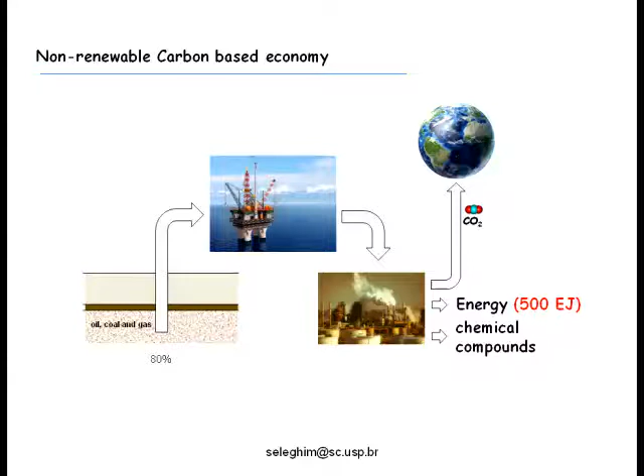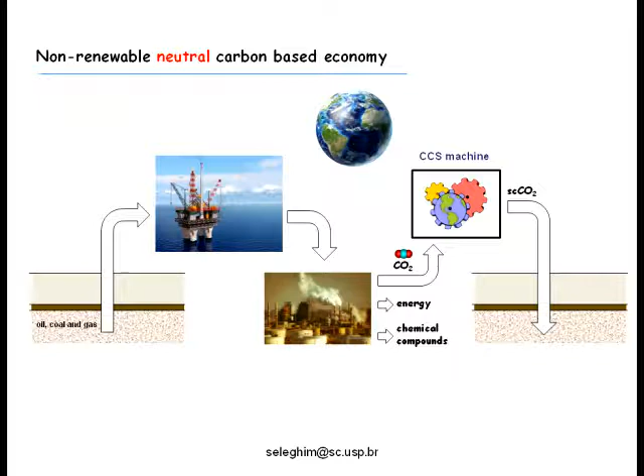The solution would be to have, if not a renewable, at least a carbon-neutral based economy. So we would need, this is just a proposition, to build something like a CCS machine, a carbon capture and storage machine, which of course will need energy to perform this task. And this CCS machine will have to inject those carbon atoms back underground. That's one possibility, but I'm going a little bit further.

We could build a renewable, neutral carbon economy. If we tackle renewable sources like biomass, which is basically solar energy stored in the form of chemical compounds in the plant, and manage to do that at the scales necessary—because scale is a very important issue in this context—this carbon atom actually was in the atmosphere. So, in principle, it's neutral.

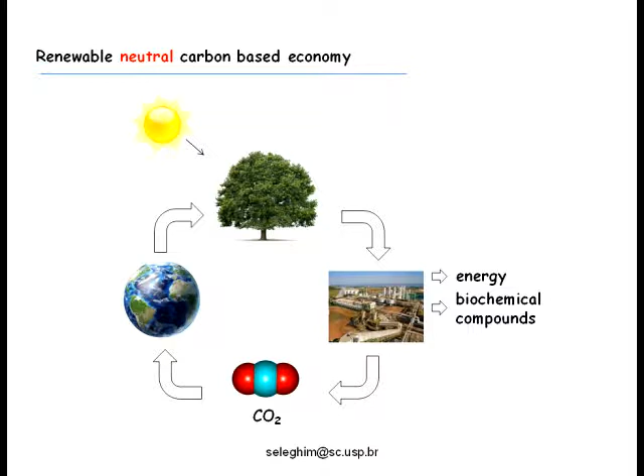We can go a little bit further and try to devise a renewable, negative carbon-based economy. What about this, this is just speculation. I'm going to show that this is possible. We're making all the calculations to prove that this is really possible.

What about transforming our biorefineries into CCS machines? If we take a little bit of the energy that this biorefinery is capable of producing and use it to capture and produce what we call supercritical CO2—I'm going to explain what that is—which is adequate for underground injection. Those are the ideas I'm showing, and that's more or less the guideline of this presentation.

Try to go from a carbon-positive economy to a carbon-negative economy. I'm going to try to emphasize the technological challenges related to these ideas. Bioenergy and biorefineries are certainly one of the most interesting possibilities for this, because it's a natural CCS machine.

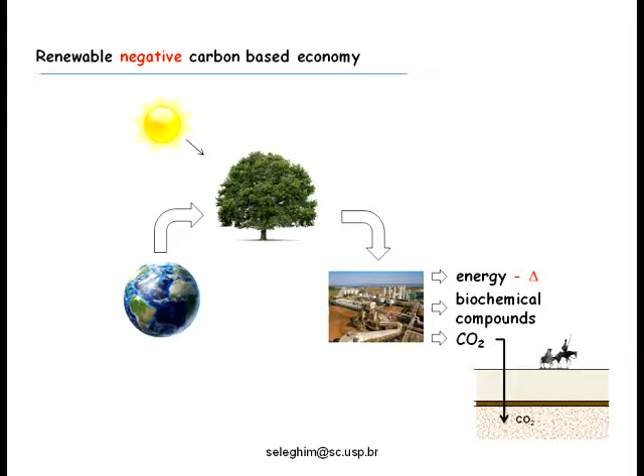But how will renewable energies displace fossil energies? That's one point. Another question: can carbon capture and storage technologies extend the exploitation of non-renewable energy sources? That's a very important issue, especially nowadays when we have these shale gas and shale oil technologies being commissioned. Sometimes the questions are more important than the answers.

And in this context, bioenergy will play an important role in meeting this expectation. Remember, I told you the world consumes about 500 exajoules of energy. What we call the potential biomass energy supply would be three times that, 1,500 exajoules.

That's the big picture. I'm going to focus on biorefineries, and as I said in the beginning of my talk, I'm going to try to elaborate what's the technology maturity level and the perspectives for transitioning to a carbon negative CCS machine. To talk about that, I need to define what we call an industrial reference unit, because I need to put numbers in these ideas.

So let's think about this model. What we call an agro-industrial reference unit is actually some amount of area on which crops are cultivated. This biomass has to be harvested, has to be transported to a central industrial unit, which will convert this biomass into products, where you have value added and you have products.

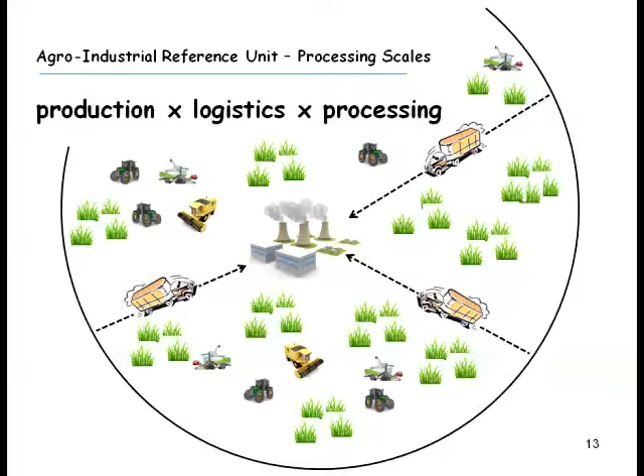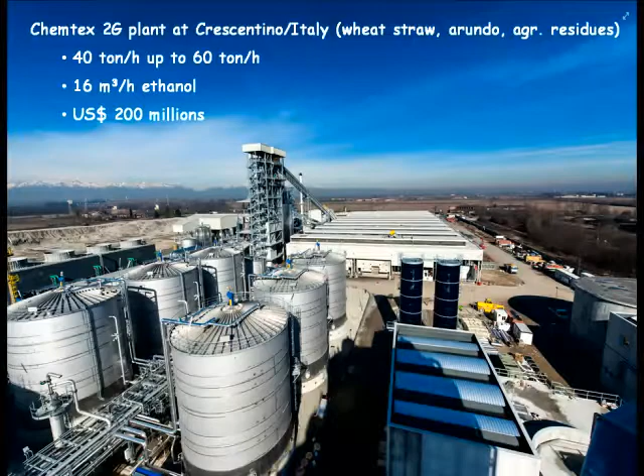Regarding a modern second-generation biorefinery, what is claimed is that these biorefineries are already operating within those limits. That's one point.

If you open each of those projects and you see the processing flow rate and all other things, you can make statistics. I made one. That's the processing rate, a histogram of processing rates, 40 tons per hour, 30 tons per hour, that's biomass, and here is just the number of biorefineries. The total here is 105 projects in 18 countries, 59 processing or assessed, with bio and thermochemical conversion. That is, in addition to combustion, you can have pyrolysis or gasification technologies, for instance.

And it's being commissioned between 2008 and 2014. So you see the majority of those projects are here, 10 tons per hour. Please bear this number in mind, 10 tons per hour. And the one that I showed in Crescentino is actually this one, 70 tons per hour.

So it's really big, but my point is it's not big enough. I'm going to show you. So that's Crescentino. Actually, it's a Brazilian company called GranBio associated with Chemtex, and GranBio is commissioning one of those biorefineries in Alagoas, not very far away from it.

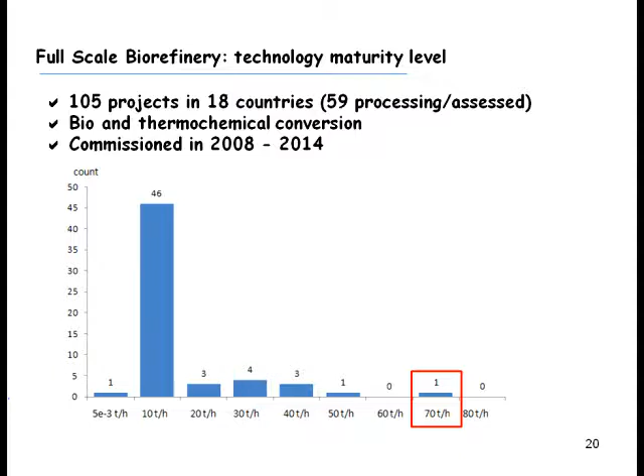So my point is that if all those projects were commissioned at this scale, 10 tons per hour, things are not being tested regarding the risks of several things. For instance, agricultural production. At 10 tons per hour, you don't have the logistics problem of bringing all this biomass to that central processing point, the industrial unit.

I'm going to show you that, and elaborate on that. Also, feedstock logistics and production, and finally, the economic viability scales, which I emphasized in my last slides.

I don't know if you are aware of technology readiness levels, TRLs. It's a scale which measures how mature a technology is, how ready it is for being tested. The first levels are the first physical and chemical concepts, the idea inside the head of the scientist, then he makes lab experiments to confirm his hypothesis, and then you can make benchtop models, engineering prototypes to test these technologies, and finally you have demonstration plants and full-scale plants. This is a scale generally accepted all around the world.

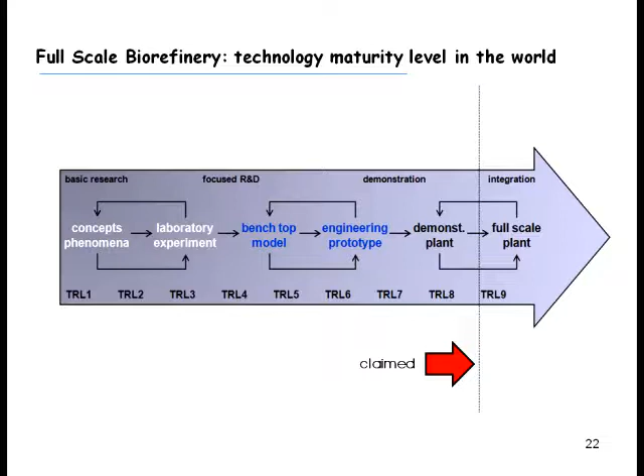What's claimed is that all those projects regarding second-generation biorefineries are already between TRL 8 and 9, which means it's very close to the full-scale plant. I'm going to argue on that. That's what's claimed, and this is actually around the processing scale of 10 tons per hour for second-generation biorefineries.

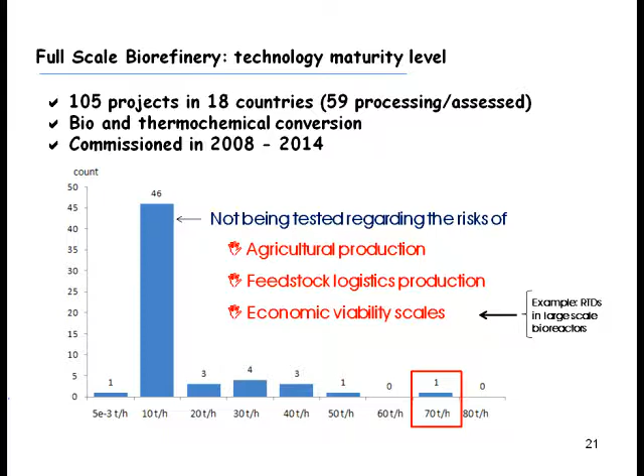So let's see some first-generation biorefineries, which here in Brazil we've been operating these biorefineries or sugar mills since mid-70s. This is 500 tons of sugarcane per hour.

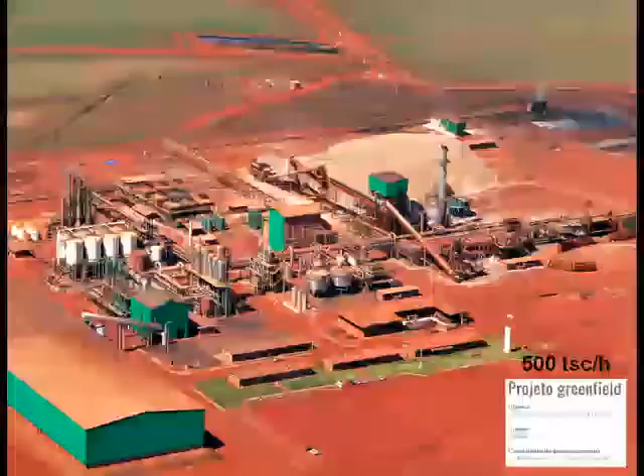This is a plant. You see, I mentioned about the logistics problem. You see the trucks here? They are unloading here, and each wagon weighs about 40 or 50 tons, something around that. And you have 5 minutes to unload each wagon, okay?

And this works for 200 days, 24 hours a day, so you cannot have traffic jams here. In order to unload these wagons, you have to be very smart in harvesting, in programming when you're going to harvest a certain field of your plantation, when it's going to be brought back to the industrial unit. And you have an additional problem: you have to minimize the time between harvesting and processing, because the plant stops photosynthesizing, so the sugar content is decreasing.

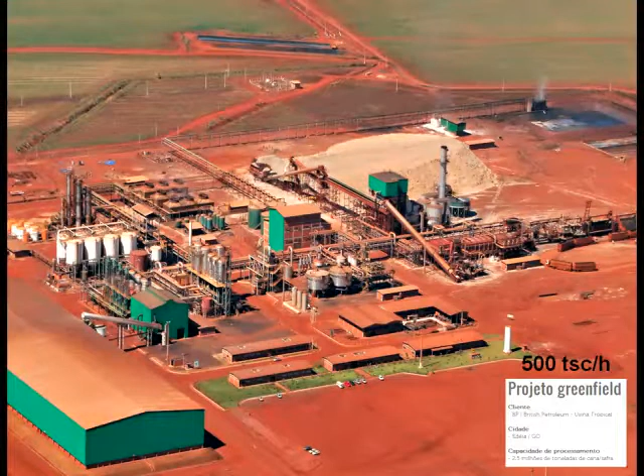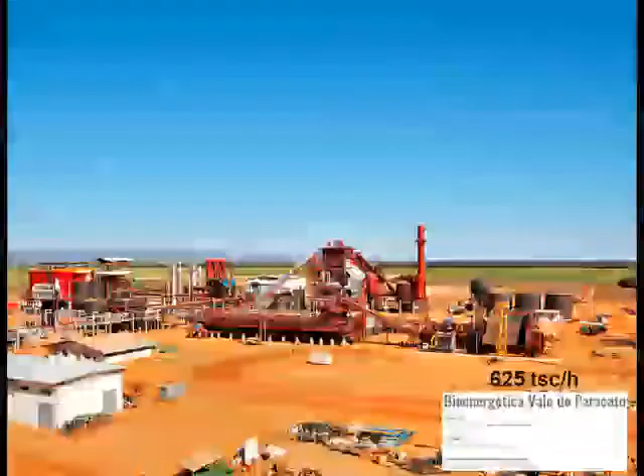So that's an additional problem, and you have to do this at these scales, which, if you think about the logistic problems, means you have to unload each of these wagons in 5 minutes, roughly speaking. So that's an average biorefinery, actually a little bit smaller, 500 tons of sugarcane per hour. And that's a big one.

It's commissioned two years ago and designed to operate at 625 tons of sugarcane per hour, near Brasilia, in the state of Minas Gerais. Those are the scales that are viable for sugarcane in Brazil. I'm using sugarcane as a test case because it's already tested. You have a lot of experience, a lot of problems that were solved successfully, so we can use that to try to infer what would be a biorefinery based not necessarily on sugarcane or energy cane, which is another variety of sugarcane, but also on other kinds of feedstocks.

But those are the scales we have to test for new technologies, or second-generation technologies, not to test, but to see if they are viable at those scales, okay? My point is that 10 tons per hour is actually an engineering prototype because you're still developing machines and processes for the industrial biomass conversion. At 10 tons per hour, you're not testing all the problems you're going to have at those higher scales, and they're going to be even higher if you think about other kinds of feedstocks.

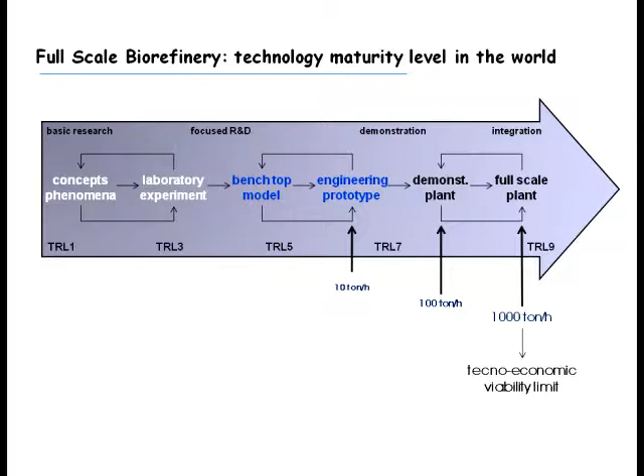100 tons per hour, which is more or less what Crescentino, the biggest second-generation biorefinery, remember it's 70 tons per hour, is already a demonstration plant because you're already demonstrating conversion models and scales, allowing extrapolation. And 1,000 tons per hour, you're actually on the game. It's going to be even bigger because, there are some photos showing what full-scale biorefinery will evolve to in the near future. That's my point, okay?

Just to emphasize one aspect of this problem, the reception and mechanical preparation of your feedstock. This is what is already working here in Brazil regarding first-generation processing for sugarcane, but it's similar for acacia, a kind of tree from which you extract tannin, for instance, and other types of biomass. But you have a problem of unloading your truck, you have to separate straw from the stalks.

You have to separate sand and dirt, which comes with your biomass, especially if biomass is being mechanically harvested. That's a big problem, and you have this time scale. It really works, I mean frankly speaking, not the separation. Separation is still a very inefficient operation, but it's a very good opportunity.

Roughly, it works. You manage to process each truck, each wagon, in 5 minutes. In Crescentino, you have 45 minutes to unload because you have bales. Actually, they are working with wheat bales, so part of the processing is done in the fields, which means it's inefficient compared to a processing made on site. And you have these scales.

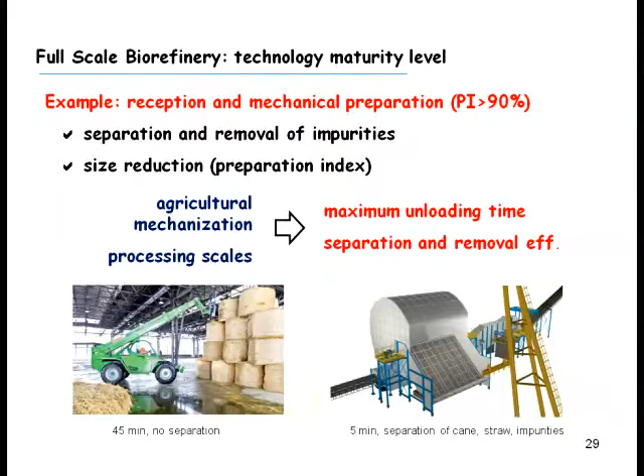So you actually don't have these logistic problems, I mean all those trucks arriving at the industrial unit. This is so sensitive. Even the geometry of the streets and roads that take you to the industrial unit is important. There is research regarding how you design these lanes, streets and roads in order to facilitate the flow of trucks and biomass and so on. This is a very serious issue.

So my point is that a new technology development cycle will be necessary. Remember, the majority of the projects in the world process around 10 tons per hour of feedstock. And we are talking about, regarding full-scale biorefineries, processing rates greater than 1,000 tons per hour. So a new development cycle will be necessary.

This is true because it can be observed in practice. There's a lot of projects that are being abandoned, redesigned, or re-engineered. Actually, these new development cycles will need these step backs.

First, we're going to look at new industrial conversion and processing technologies. Unloading biomass is a very important issue when you work at big scales, and it depends on the characteristics of your biomass. This is a very important issue.

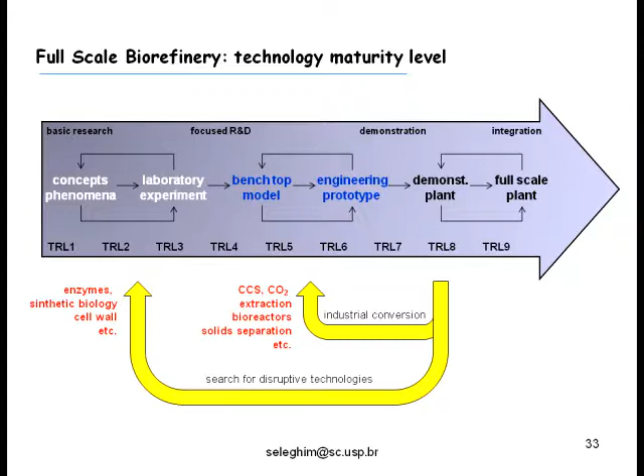Also, you're going to have to look for new disruptive technologies based on new scientific discoveries, I mean more efficient enzymes which can be produced at large scales at low cost. Those are some research opportunities regarding the most basic levels of engineering research.

And CCS is here. Because remember, in the beginning I was telling you that we can speculate on transforming our biorefineries into CCS machines. I want to show you how this can be possible, because part of your revenues can be generated not just by selling electricity, ethanol or some other biofuel or chemical compounds, but also by selling carbon credits, if this market really becomes viable, which I think it will because of shale oil and gas.

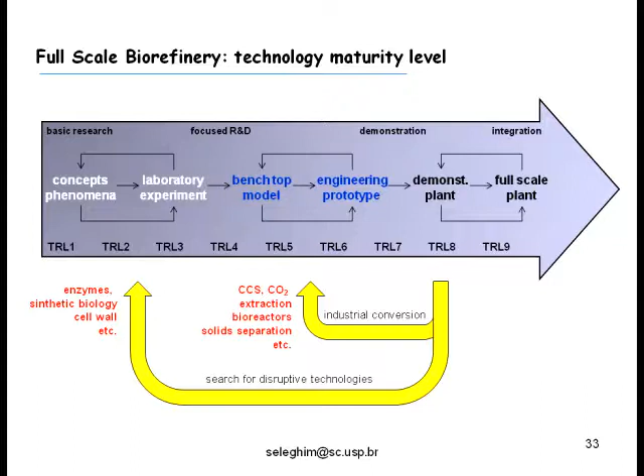Actually, I jumped to the conclusion of my presentation, but I'm going to come back and go ahead. So regarding our industrial biorefineries, that's the point: possibly 99% of biomass processing will be dedicated to producing energy vectors, electricity and biofuels, and possibly 1% of this biomass is going to be used to produce high-value biochemical compounds. That's from the point of view of processing.

If you look from the point of view of economics, maybe 50% of your revenues comes from energy vectors, 50% from high-value biochemical compounds, and 50% from carbon credits. It's not summing to 100% of course, and this is just a joke to provoke you all, because this idea of producing carbon credits may be an extra source of revenues which were not considered in the beginning, when the first biorefineries, especially the second generation ones, were devised.

And to justify the scales, if we want to do that, we need to consider from the beginning the scales that we are going to work at. This is a histogram of all Brazilian sugarcane mills: this is the number of mills, or the frequency, and the processing scales. You see that the majority is around 500 tons per hour,

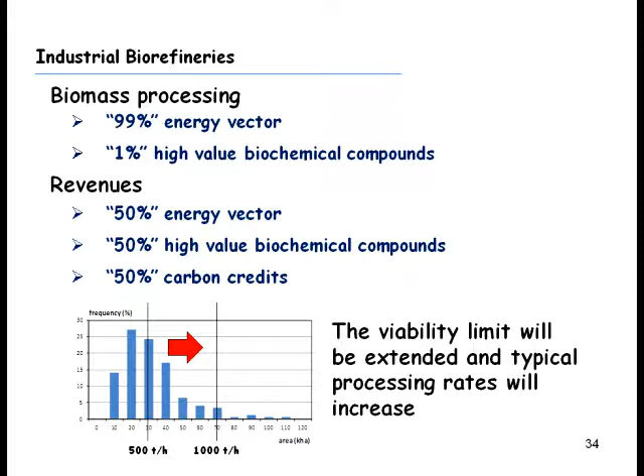And why do you want to increase processing rates? Because you increase your revenue rates, let's say like that.

Let's take the sugarcane sector in Brazil as a case study, and we already defined our industrial reference unit. So what are the actual numbers we have to work with? I'm going to take 500 tons per hour, which is the average today, but this is going to double or triple in the near future. We already have sugar mills processing more than that, and this corresponds to an area around 30,000 hectares. So the area around my biorefinery is, on average, no bigger than 30,000 hectares.

It depends on the value of the product, because if we make the same analysis regarding acacia—a kind of tree where you can extract tannins from the bark to process leather, make glue, and for several chemical processes—this area for sugarcane corresponds to a radius of 20 to 30 kilometers. For acacia, because the value of tannin is higher, this can extend to 100 kilometers. The area is bigger.

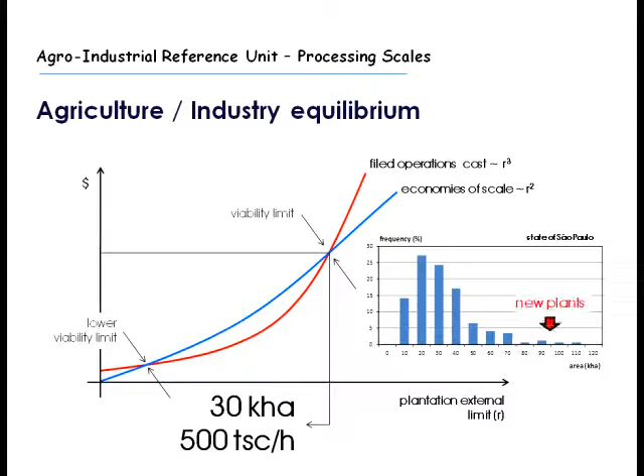So you have to have another agricultural model. But coming back to the sugarcane industry, that's an important issue because it means your energy vector production—ethanol, biofuel, or electricity—is dispersed across the fields. You're never going to have a very big refinery like a petroleum refinery. So if you're considering producing these energy vectors, it's going to be a distributed production. And as I mentioned, the new plants are being commissioned in this region of the histogram.

So that's our reference model. We can start by defining that our plantation area is 30,000 hectares. If we multiply that by the average productivity and so on, you get those 500 tons per hour, which has to be processed during 200 days, 24 hours a day, in your sugar mill. For this number, you also have the production of 35 tons of sugar per hour, or 42 cubic meters per hour of ethanol.

You also have a surplus of electricity around 50 megawatts during the whole year, because you burn bagasse to produce that, and you have enough bagasse for your 200 days and also for the rest of the year. You also have CO2 emissions here—this is from fermentation only.

You have water input—this is an important point. You also have vinasse. Going back to the fields, when the plant grows, it extracts nutrients from the soil, NPK, and that is done at the rate of 1 ton per hour. So you're impoverishing your soil, and all these nutrients end up diluted in the vinasse.

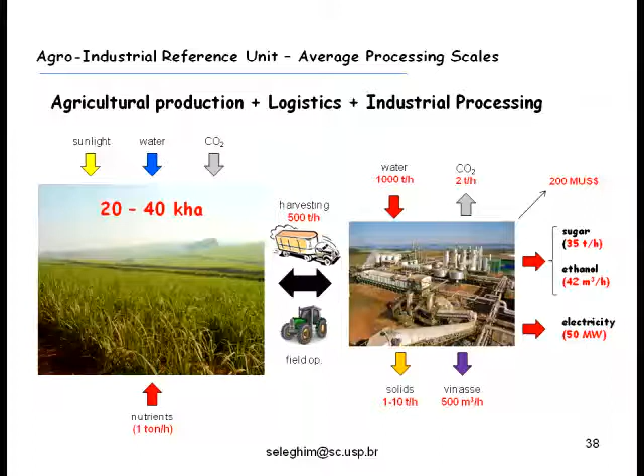We can do a lot of things with that reference industrial unit. I'm calculating some numbers regarding carbon capture and storage, just to give you an idea of the potential these biorefineries have in terms of mitigating greenhouse effects. So let's see, what would be the potential for CO2 capture for one refinery, for one sugarcane mill?

If you consider fermentation over 200 days, you have emission of 2 tons per hour of CO2. That's not impressive, but bagasse combustion to generate energy, done during the whole year, gives you 89 tons of CO2 per hour. Let's disregard the fermentation number and focus on this one. If we find some new technology to capture this CO2 and inject it into underground layers, what would be the potential?

One mill would be capable of storing 0.79 million tons of CO2 per year. If you multiply that by the number of mills in Brazil, roughly 450, the annual CCS potential would be 355 million tons of CO2 per year, which, compared to Brazilian annual emissions, is roughly on the same scale.

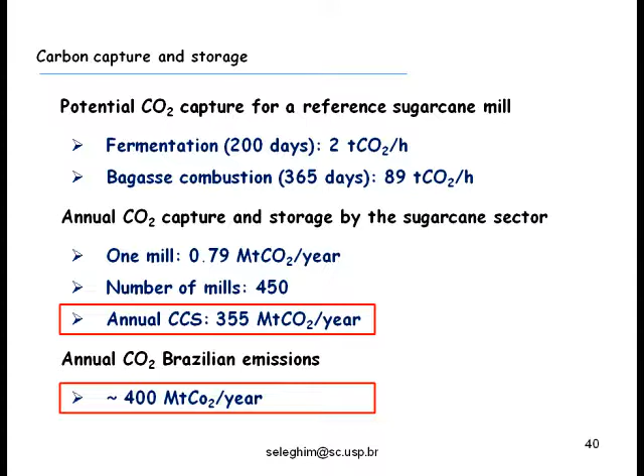But let's see if, from the technology point of view, it is feasible. It's not really dreaming. Let's compare, because I'm going back one slide. I'm talking about integrating first generation and second generation. I need to elaborate a little bit on that before talking about these conversion pathways. So just to summarize the numbers that I showed you before, spread in several slides.

A sugar mill or a biorefinery, a first generation biorefinery, is a kind of commodity. You can sign a contract, you give the area to these industries, you give some electricity, some water for them to build, and after 1 or 2 years, they are going to give you this sugar mill operating. Okay, it's really working to that point. I mean, it's a commodity.

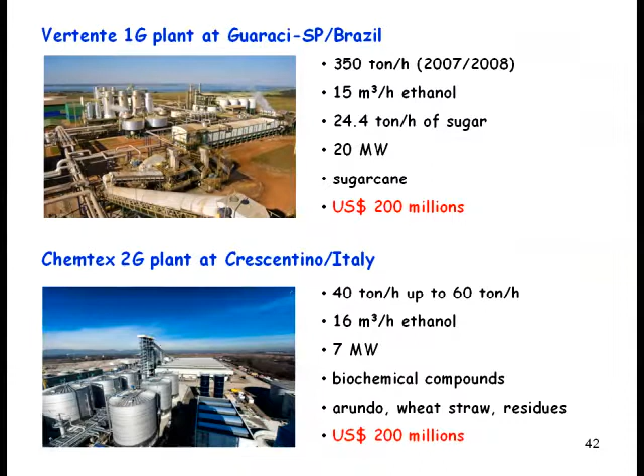So my point is, if you have the possibility of using first-generation conversion pathways, why are you going to buy a processing plant that is capable of using only second-generation pathways? I mean, the assumption is that you are able to use first-generation pathway. I'm just provoking you guys, those that are not sleeping yet, and bear that in mind because I'm going to elaborate on those numbers. Okay.

I need to explain what biomass deconstruction is all about. Well, I'm going to do this very quickly, actually. I prepared a kind of animation. Let's see what biomass is. You have a plant, whatever, sugarcane or corn or acacia, and let's say that this plant has fruits or seeds, for instance, and these seeds have molecules, simple sugars that can be processed through first-generation pathways.

Let's take sugarcane. Sugarcane has juice. This juice has sucrose. Sucrose can be fermented without further chemical processing. So that's what I call first-generation pathway. Now let's see the second-generation pathway, those parts of the plant that do not have those simple molecules that you can process through first-generation pathways, direct fermentation, for instance. So I'm roughly talking about the lignocellulosic part of the plant.

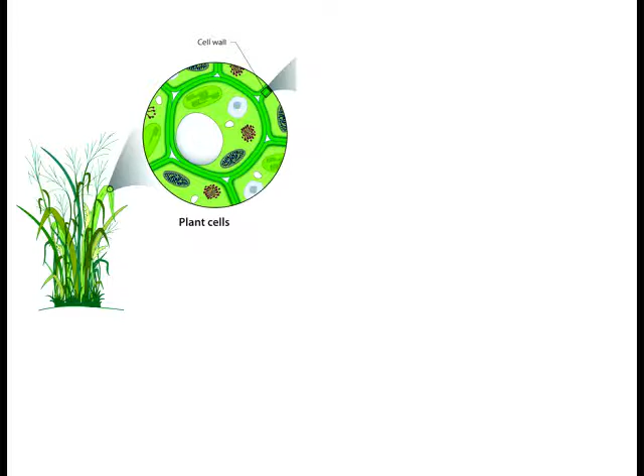So if we could cut a small piece of the plant, and if we could zoom on this piece, what we would see is a cell, for instance, with all its internal structures, and you have the cell walls. And most of the biomass that you are interested in that has a high energy content is related to these cell walls. So let's zoom in again. You have several layered meshes or several layered microfibrils.

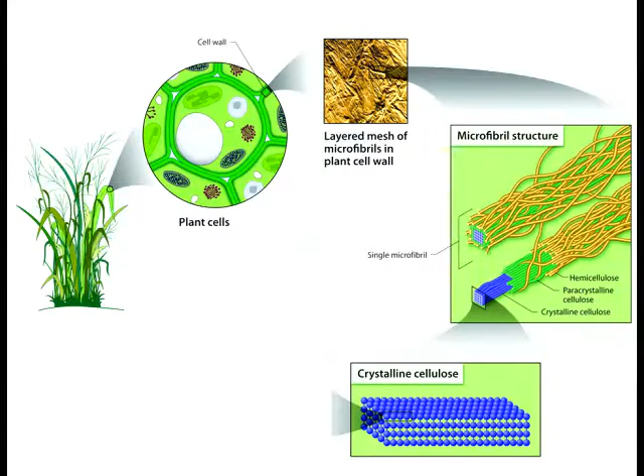Let's zoom in again. These microfibrils are organized into other layers of fibers. Let's zoom in again here. You have this, this is cellulose, which is a crystalline polymer, very regular.

And if we could zoom in again, we get molecules of interest. Cellulose is all of that, and each monomer here is glucose. So if I could cut these bonds here with very tiny scissors and separate this part of the molecule, that's glucose, that's sweet. If I could put it in my mouth, it would feel a very sweet taste.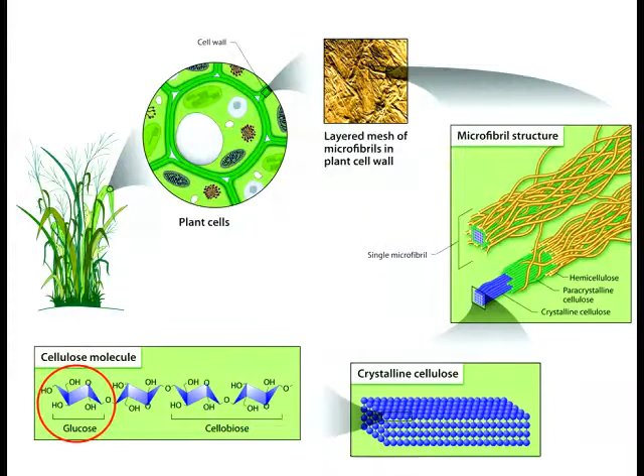And we can process this part of the molecule through first-generation pathways. Yeast can ferment this kind of molecule, but cannot ferment the whole molecule, or even less, the bigger structures here. So biomass deconstruction is the process of getting those fermentable parts of the molecule. That's what has to be done.

There's a lot of people trying to develop technologies to do that at those scales that I mentioned. There's a lot of technology that can do that by several ways, several pathways, but some are more viable, some are not. So this still has to be tested at the scales for the business, the whole business, to be viable.

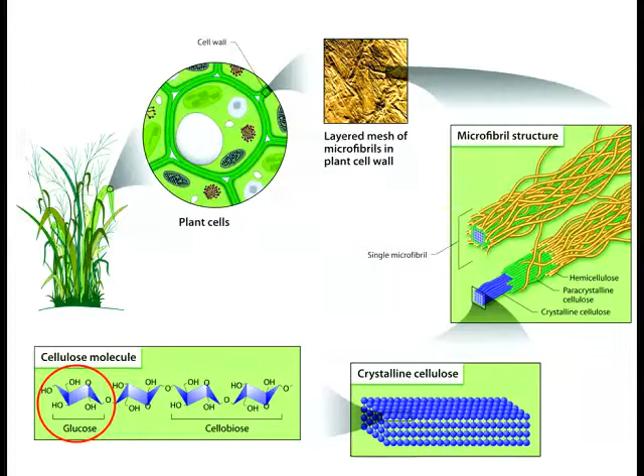So the objective is to separate those molecules which can be fermented through or processed through first-generation pathways. An integrated 1G, 2G model would be something like that.

Let's suppose that we're processing corn or maize. You harvest the seeds here, and all straw and stalks and so on. So you have an industrial separation operation here, which will separate the parts of the plant that can be processed through first-generation biochemical routes. That's for corn, but that's the same for sugarcane.

And what's not processable through first-generation pathway goes to second-generation pathways and also thermochemical pathway. If you have straw here, you can use part of the straw to generate energy and also chemical compounds through thermochemical pathways. In addition to combustion, you can do pyrolysis or gasification, which enables you to produce gasoline, for instance. In the Second World War, the Germans produced a lot of gasoline for their Luftwaffe and the tanks and so on from coal, following a thermochemical route.

But we're talking about this one, the second-generation biochemical pathway, which means, going back one slide, to do all these operations here. So all these operations here are done in this biochemical second-generation pathway. It enables you to produce fuel or biofuel and chemicals by saccharifying parts of the biomass that you can ferment. And what you cannot, residues, lignin for instance, you can send to the thermochemical pathway to generate energy.

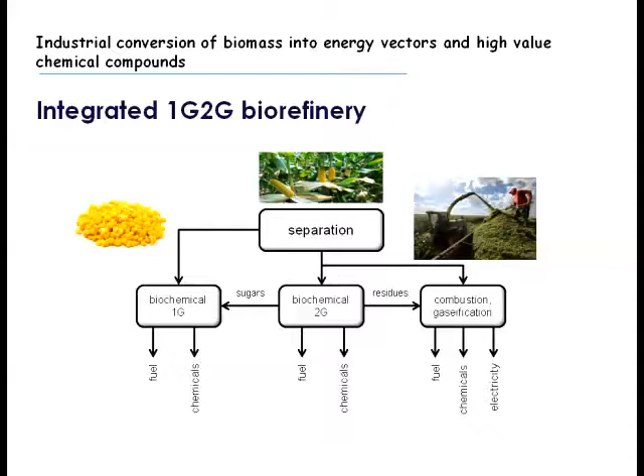Zooming in those processes, that's what's being done today, the first-generation sugar mill. We have sugarcane, we have the mechanical processing, which will chop, will increase area for processing, but also it will separate straw and sand and dirt from biomass. So straw can be sent to a boiler in order to generate steam, in order to generate electricity. And what is processable through the first-generation pathway, sugarcane juice, goes to fermentation, distillation, ethanol.

And here you have what's not fermentable. You have bagasse that you will dewater. Bagasse here has a humidity percentage of around 80%. That's not possible to burn bagasse at those humidities, so you have to dewater to decrease that to 50% humidity. That's what's possible. So I'm stressing this because this operation consumes a lot of energy in the whole process.

Evolving that towards an integrated first and second generation process would mean what? Would mean to include a biomass deconstruction processing pathway. So it's something like this, roughly speaking. You have some amount of bagasse and some amount of straw has to be pre-treated and then hydrolyzed in order to get sugars, fermentable sugars, to increase ethanol production.

And what's not fermentable, residues, lignin, for instance, goes to our new biorefinery, our new second generation process, which will recover some chemicals to produce some chemicals in order to generate revenue, but also it will recover solids. We have solids here, solids with high energy content that can be burned to generate energy. These processes have to be developed and included in the already existing first generation processing model.

But let's go further. Let's see how this could be transformed into a CCS machine, a carbon capture and storage machine, which means that this CO2 here, that's going back to the atmosphere, it has a small greenhouse potential because this carbon was in the atmosphere in the first place, it was captured by the plant. It was not stored in the underground. So the greenhouse potential is low. But instead of emitting that to the atmosphere, we could capture and insert that in the underground. So let's see how.

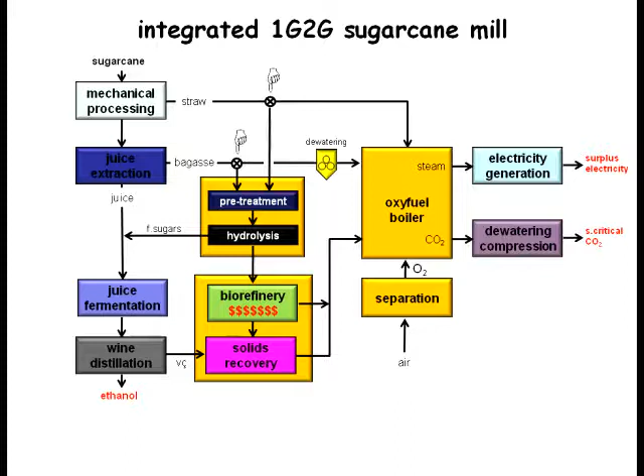The processes that we have to develop, I'm going to show you how this can be done. But first, let's see the sensitive or disruptive technologies related to those ideas, which we are speculating on in order to see if it's possible.

First of all, biorefining and upstream processes mostly focus on first-generation processes, so we need to develop more advanced biochemistry. Also a very sensitive technology is the development of low-energy separation methods. Pneumatic transporting, for instance, is some technology that we are investigating right now. Also, regarding second-generation conversion, we need low-energy pretreatment methods and enzyme production for hydrolysis. That's related to biomass deconstruction.

I'm not going to elaborate on that because that's not the right place, but those are sensitive technologies. That means we have to invest in that or look for partners in order to do that more efficiently.

Also, if we want to evolve to a CCS strategy, we have to develop oxy-fuel combustion strategies. Remember, we always need to do that at those scales I mentioned in the beginning, 500 or even more, up to 1,000 tons per hour of biomass processing. So we need to develop oxy-fuel boilers and also low-energy O2 separation techniques. Those are the sensitive technologies.

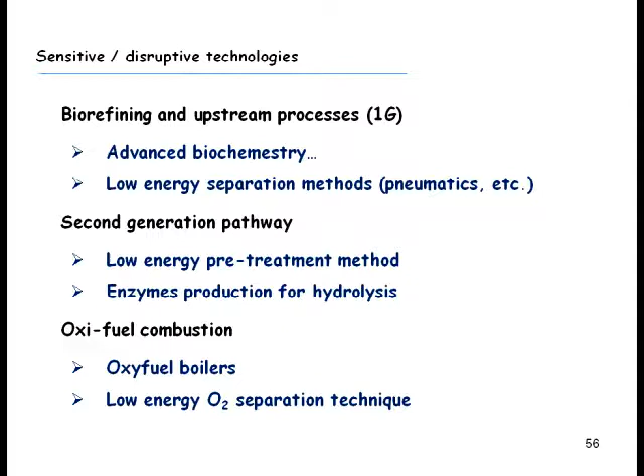So let's see what an oxy-fuel boiler is. Let's start with a traditional boiler. You have biomass being injected here, air is injected here, it burns, heat is used to produce steam, and you have flue gases here in your stack.

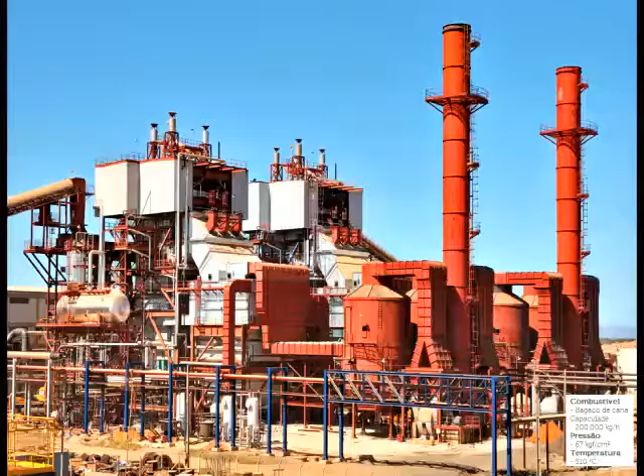That's a photo of, actually, two boilers, not only one, from that sugar mill near Brasilia that I mentioned. So that's the size of a boiler like that - it's very, very big. We're going to use the steam to drive a power cycle.

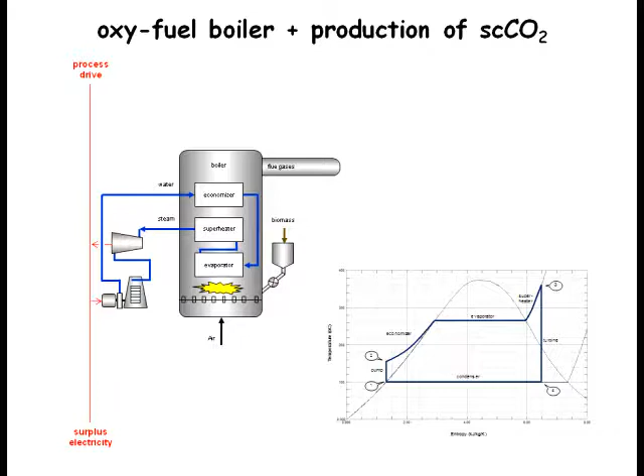This is the thermodynamic cycle. It produces energy - that's the red arrow here. This energy is going to drive all other processes in your industry. You can sell the surplus electricity. Remember, for our reference unit, you have 50 megawatts there on average. And everything you need in terms of energy, you're going to draw from this red line here. So that's the first generation power cycle in a traditional mill.

To transform that into an oxy-fuel boiler, what you have to do is use some energy in order to separate oxygen from air. So you have oxygen here, you have nitrogen here, for instance. This can also be a source of revenue. So you have oxygen here, which can be used to burn biomass.

Actually you cannot do that with pure oxygen, because if you do that, the combustion temperature will be so high, 3,000 degrees Celsius, that it will completely destroy your equipment. So it has to be diluted with something, and we're going to use CO2 to dilute this oxygen - just to anticipate what's coming next. But if you burn that with oxygen and some CO2, what you have here in your flue gases is CO2 and water.

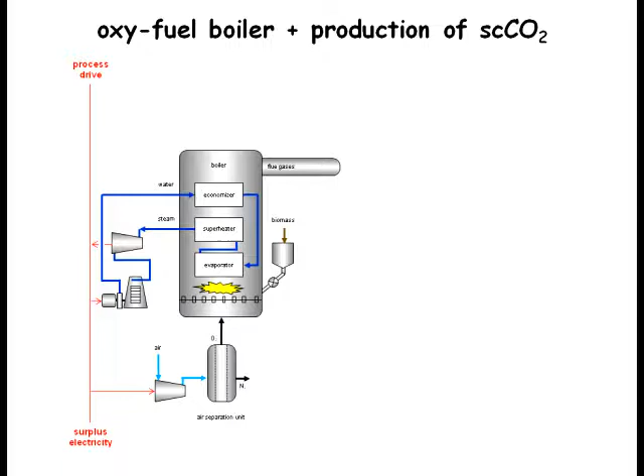Anything else? First step is to separate water, which you can do just by cooling your flue gases. Water will condense, and you have some amount of water here. By the way, a lot of water - something like 50 or 70 tons of water per hour.

It also can be a source of revenue. Remember, a first generation mill imports on average 1,000 cubic meters per hour for processing. That's a problem today, and we're trying to prove that a source of water could be the condensed water from the flue gases.

So if you condense water, you have virtually pure CO2 here. You can use a small amount to dilute O2 in order to decrease the combustion temperature to ranges around 500 degrees or so, and you have a pure flow of CO2 here.

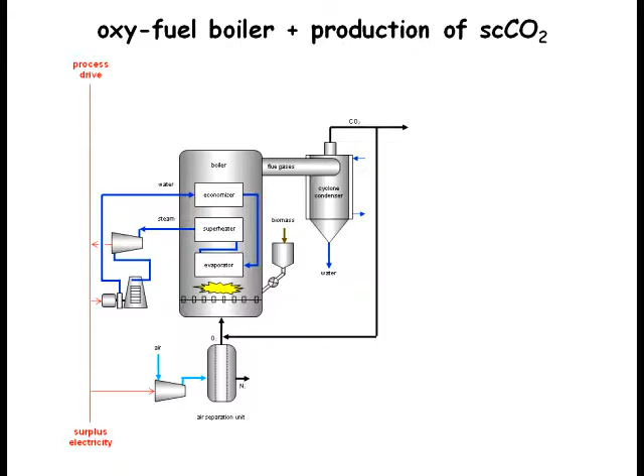But it's gas CO2 near 170 degrees, near atmospheric pressure. If you try to inject that underground, it's not possible, because it has a small amount of mass that occupies a very big volume. So it's not adequate for underground injection. What you have to do is transform this gaseous CO2 into what we call supercritical CO2.

I'm going to explain what that is. What you have to do is a series of compressions and coolings. You draw some energy from this energy line here. You compress CO2, then cool it, compress again, cool it, compress, to achieve levels of pressure and temperature in which CO2 is said to be supercritical.

A supercritical fluid, you have pictures here if you've never seen one - supercritical fluid is actually a fluid where the gas phase is soluble in the liquid phase. You have a kind of mayonnaise here. If you could look at that with a microscope, you'd see a kind of mayonnaise. And it's very interesting because it has very good properties.

It behaves more or less like a liquid. I mean, the density is very close to the density of the liquid, but the viscosity is very close to the viscosity of the gas.

If you're going to inject that in a rock bed, for instance, which has pores, very tiny caves let's say, because the viscosity is so low, it will flow very finely through these pores within the rock. And because the density is so high, that means you're going to store a high amount, a lot of kilograms or tons of CO2, just by pumping this supercritical CO2.

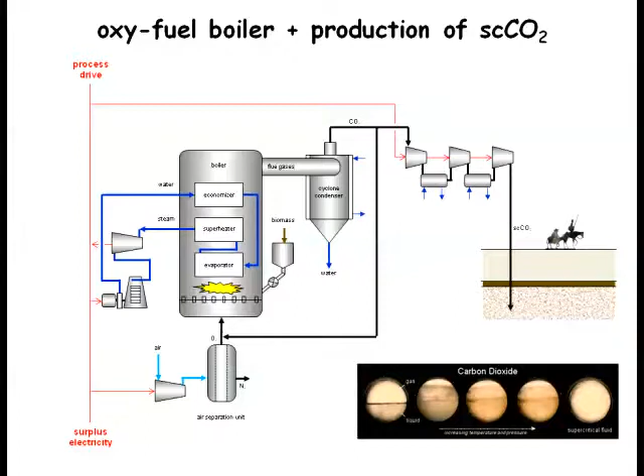I want to talk a little bit about shale oil and gas, because I think it will change the whole scenario in 10 or 15 years. And still, biorefineries will play an even more important role in this scenario, because if fossil CO2 emissions increase since shale oil and gas is so cheap, that's even more reason to have CCS machines. My whole point is that these biorefineries can play the role of CCS machines. Okay, so let me just talk about

hydraulic fracturing techniques, and also about the environmental consequences related to the fact that this technology is still not very well tested - but it will be. That's at least my belief.

So shale actually is, let's say, fossilized mud. You have these layers of mud, which has a lot of organic material, and it fossilizes, so it's a kind of porous rock with a lot of gas or oil entangled in these crystalline structures regarding this rock. The problem is that it's not like a porous rock.

If you drill a hole here, that doesn't mean the gas or oil is going to flow through this rock to get to this hole - it's not going to do that by itself, as in a petroleum or gas reservoir. The problem is that it's so tightly entangled within this crystalline structure of the rock that you have to do something else.

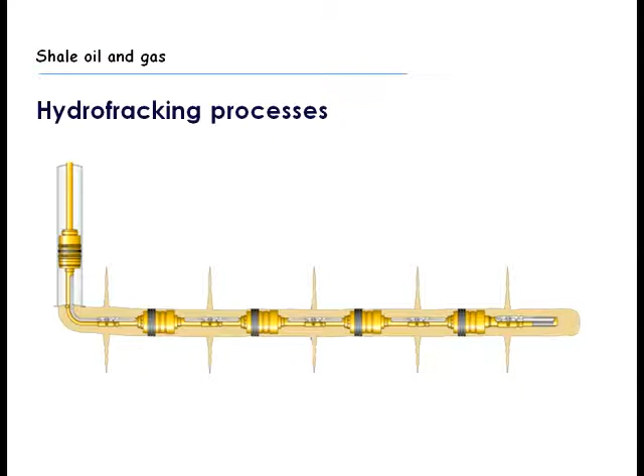So that's what hydrofracturing is. You drill a hole, and when you get to the shale, you continue this layer. Then you insert this kind of probe with several plugs, and from inside this pipe, you inject a very high pressure pulse, like a water hammer. This pulse will fracture parts of the rock, creating several micro fractures which mimic our lungs. The idea is to increase the interfacial area to enable entangled gas or oil to flow through these fractures and finally to the well, so you can extract it.

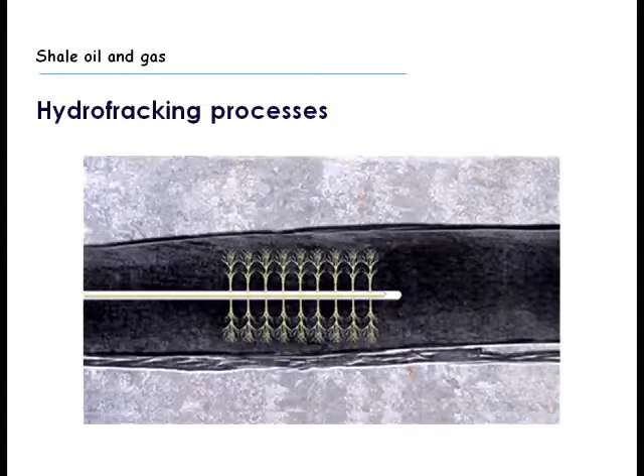I'm going to talk about the environmental problems and the geopolitics, but let's talk about the problems first. Remember, problems are opportunities. If you're not able to confine all these fractures within the shale, they can reach water reservoirs. The gas, instead of flowing through the well, will flow to these water reservoirs and eventually reach a water lake or even water wells. So you have contamination, because the technology is not well tested for these purposes.

This is not a new technology. It has been done for copper exploitation, for instance in Chile—they use this technique there. It has been adapted to shale, but you have to test it and solve the problems. There can be several types of solutions; you may have an impermeable layer that will confine the gas underneath it. But those are the problems.

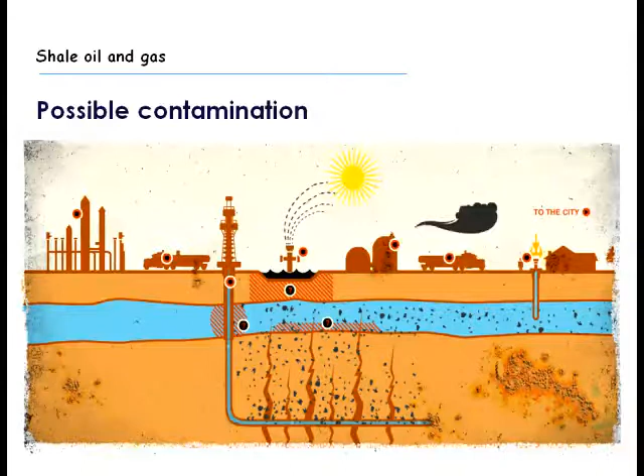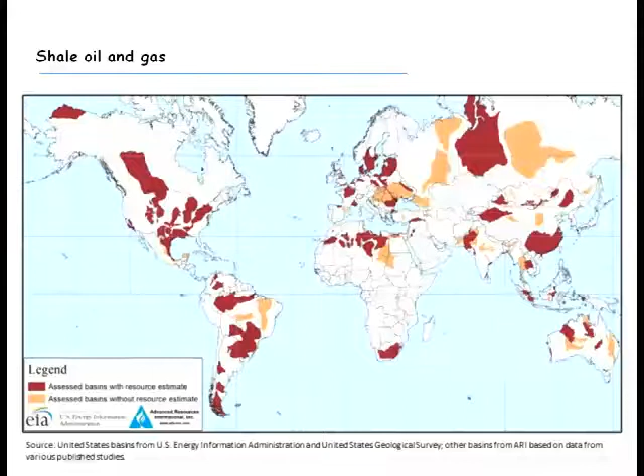Let's see the advantages. Shale, actually, the whole world has—almost every country has it. So it's very different from petroleum, which is confined to a few countries. Brazil has a lot in the Northeast region, as do the United States and Russia, and in addition to having a lot of oil and gas, they still have shale. It's also onshore, so it's very cheap to explore compared to offshore exploitation. It's worldwide, evenly distributed onshore.

The hydrofracking technique enables commercial exploitation. We can assume that the problems being observed today will be solved in the near future. There are estimates that 35% of world oil and gas supply will come from shale oil and gas. Prices will drop because of the increased supply, by 25 to 40%, which means our pre-salt exploitation will be endangered because of oil prices. It may be a very big mistake that we made by investing in pre-salt oil instead of investing in shale oil and gas.

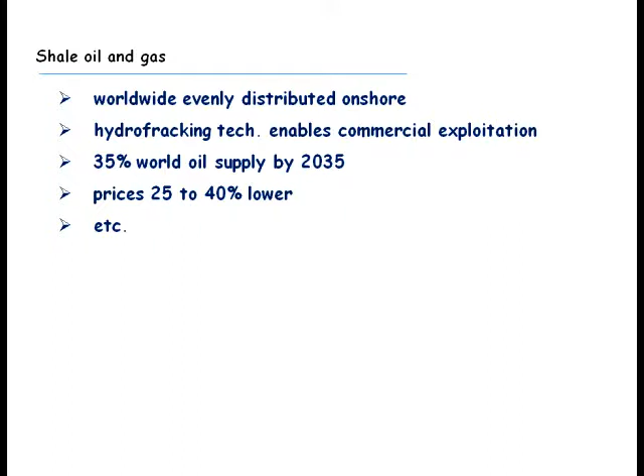Concluding, the scenario is changing. We don't know how it's going to change. Maybe shale oil and gas exploitation will represent an even stronger drive for efficiency and low cost regarding biorefineries, and not only biorefineries, but all other sources of renewable energy. This is a problem, but also a very good opportunity for new, more efficient technologies. Regarding CO2 emissions, biorefineries can play the role of sun-driven CCS machines—not only displacing fossil energies, but also recapturing CO2 to inject underground.

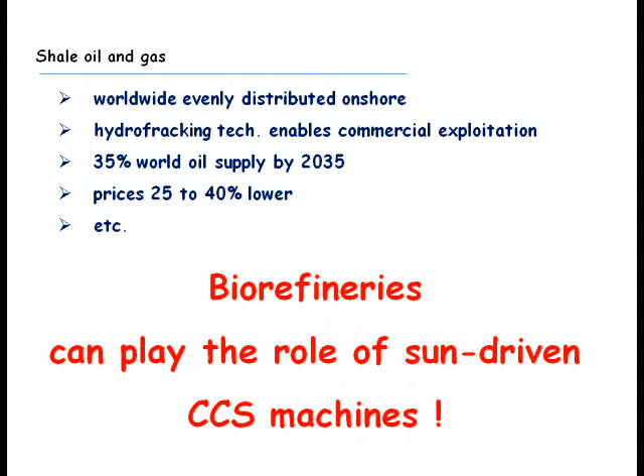And this is still speculation. A carbon-neutral economy could be something like that, because although these sources are non-renewable, they are so cheap that we're not going to avoid their exploitation. This is possibly going to increase, and we are going to increase fossil CO2 emissions. The idea is to devise these CCS machines so CO2 can be captured by plants, which are essentially sun-driven CCS machines, because they convert solar energy into chemicals containing energy from the sun. This biomass can be used to produce energy, biochemicals, and so on. If the amount of energy necessary for supercritical CO2 production is smaller than the amount of energy I can produce, we can re-inject the CO2 and have a neutral effect.

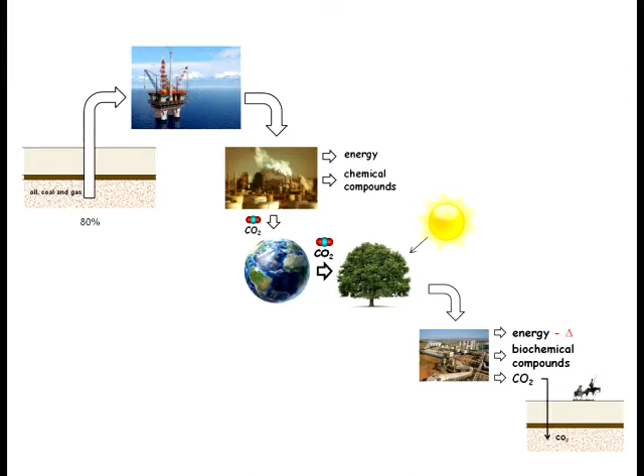I tried to elaborate on the technology challenges related to this. Well, I hope you had a good time. Thank you very much.